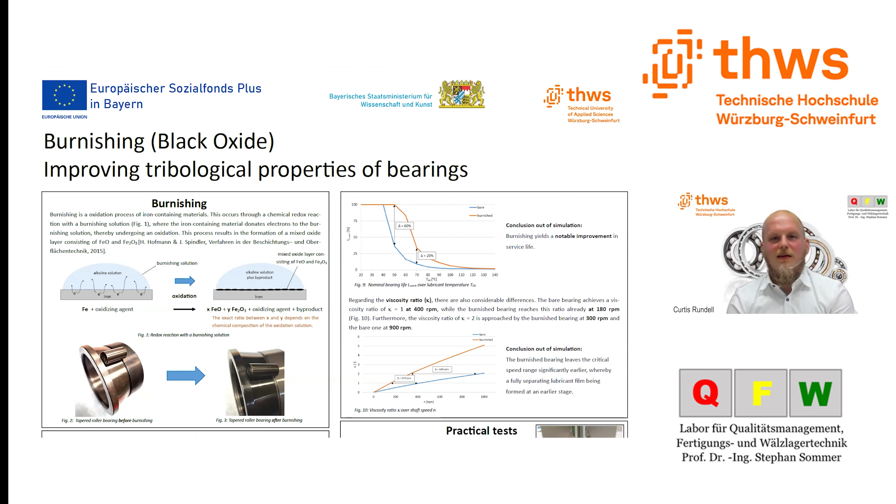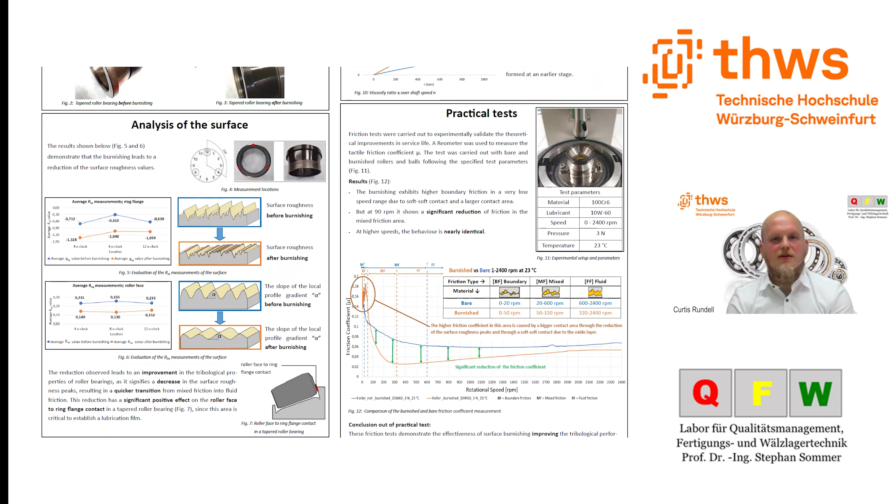Hello, my name is Curtis Rundell, and I'm an ongoing master student for production and system development at the Technical University of Applied Science, Würzburg-Schweinfurt. I am also a research assistant for Professor Dr. Sommer in his laboratory for quality management, production, and bearing technology.

As working as a research assistant, Professor Dr. Sommer assigned me and two other research assistants, Anna Heinle and Dominik Stephan, to analyze the impact of burnishing on the tribological properties of bearings, and in particular, the effect on tapered roller bearings. This is because he has the thesis that burnishing will reduce the surface roughness, and this will lead to an improvement in the tribological properties of the tapered roller bearing due to the flange face contact that occurs in such a case.

The way we designed our approach to analyze the effects of burnishing can be seen through our poster we created to publish our results. We divided the workload among the three of us. It was my job to gather the theoretical information on burnishing and then to develop a way to analyze the effects of this treatment to the surface it is applied on. Anna Heinle was then responsible for creating a suitable simulation model and then to simulate the results that have been gained through the analysis. To finish our research and to tie all loose ends, Dominik Stephan was then in charge of the practical tests so we could compare the measured and simulated data with the real life.

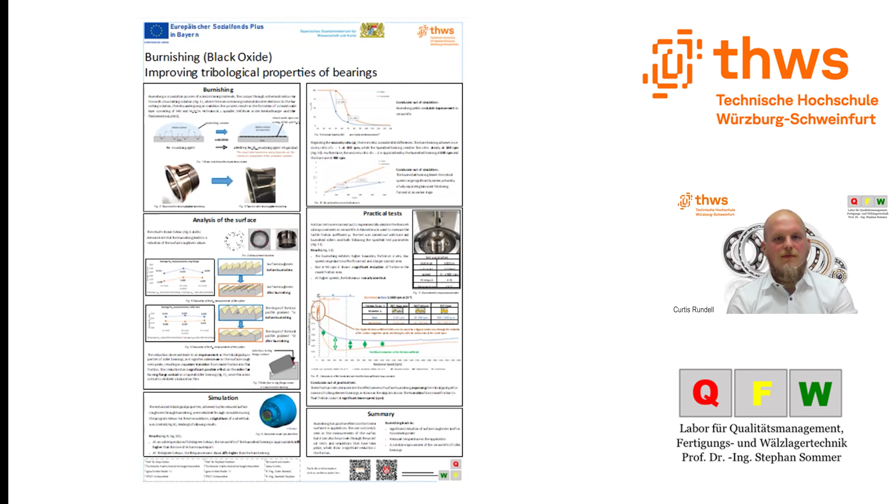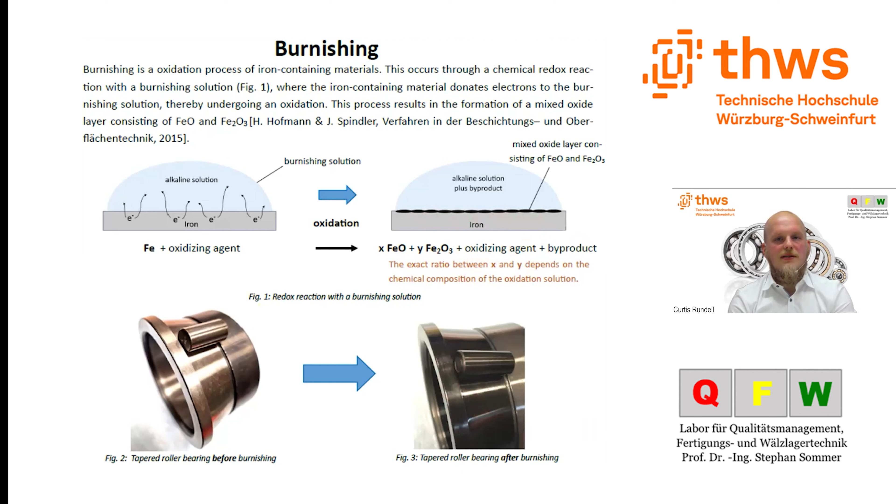So, if we look at what burnishing is, then we can see that this is a chemical reaction of an iron-rich material with a burnishing solution. This reaction is a redox reaction, where the iron gives the solution its electrons, undergoing an oxidation in which a very thin layer of mixed oxide consisting of FeO and Fe2O3 is developed, as shown in Figure 1. These are iron oxides, leading to the characteristic blackening of the surface, also shown in Figures 2 and 3. To mention here is that the exact ratio of FeO and Fe2O3 depends on the composition of the burnishing solution.

Now let's look at the analysis of the surface. Important also to mention here is that we disassembled the bearings and measured the surface of each component multiple times before and after the treatment with the solution. The exact measuring location and direction is pictured in Figure 4, and the results of these measurements on the inner ring flange and the roller face are pictured in Figures 5 and 6.

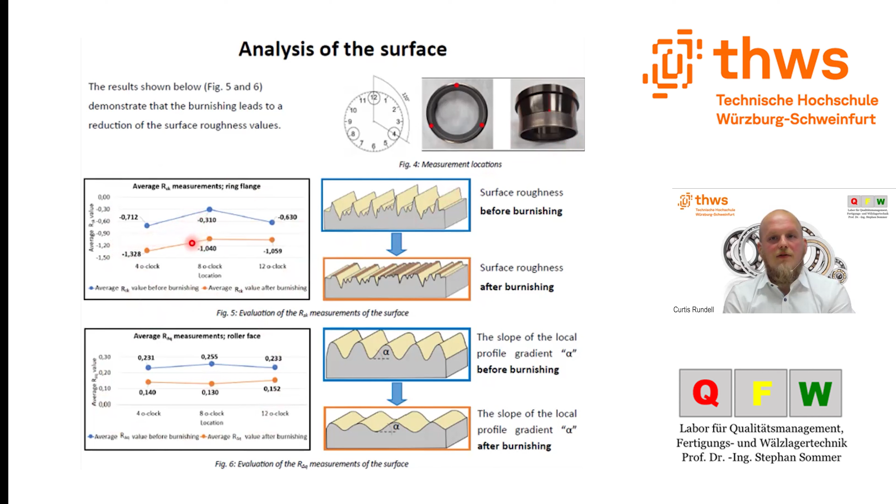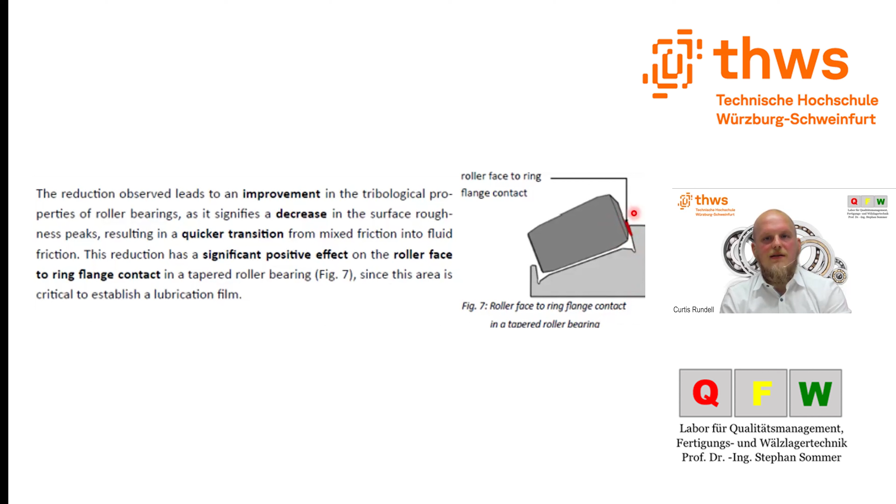If we look at these graphs, we can see a significant decline of the surface roughness values of the inner ring flange and roller face after the treatment with the burnishing solution. These significant reductions all indicate that through this treatment, the tribological properties of the tapered roller bearings must have been improved, and in particular because the reduction is also observed in the area where the flange face contact occurs. To verify these results, let's look at the simulation. For this, I will now let Anna Heinle take over.

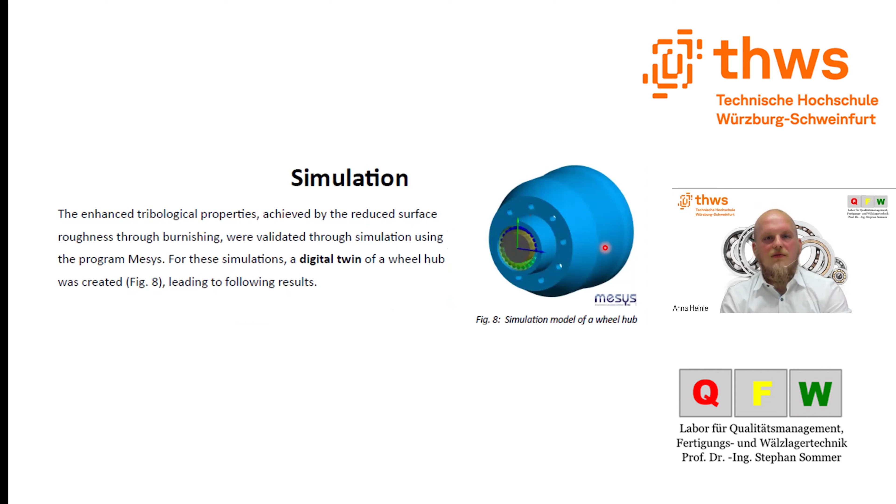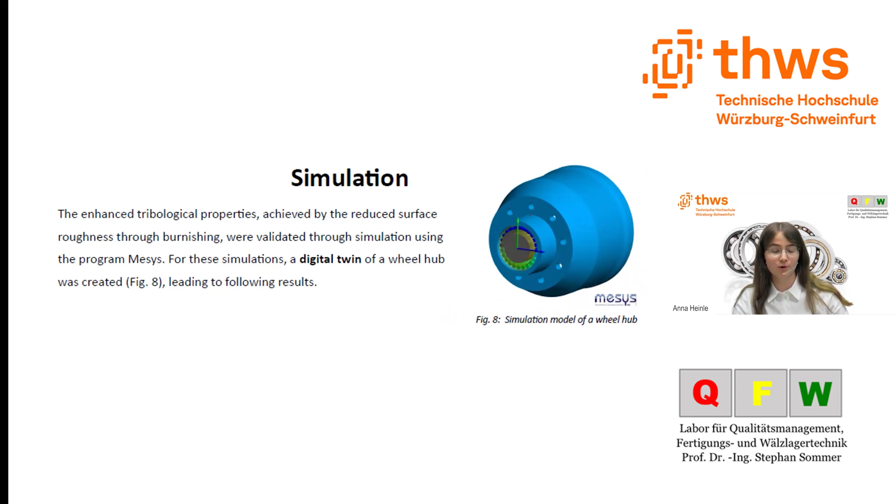Thank you, Curtis. My name is Anna Heinle, and I'm a bachelor student at the Technical University of Applied Science, Würzburg-Schweinfurt. And I'm also a research assistant in the laboratory of Professor Sommer. In this project, my main focus was on bearing simulation. For our simulation approach, I created a digital twin of a wheel hub in a bearing simulation program, MESYS. This is what you can see here in the right upper corner. The aim of the simulation was to investigate the effects of burnishing on bearing lifespan and other important properties of bearings. So let's look at the results.

In this diagram, for example, the bearing lifespan is plotted against temperature. At an oil temperature of 50 degrees Celsius, for instance, the lifespan of the burnished bearing is about 60% higher than the one of the bare bearing. Or regarding another point, at 70 degrees Celsius, the lifespan is still about 20% higher than the one of the untreated bearing. As you can see, the diagram shows clearly that a reduced surface roughness of the bearings through burnishing leads to a significant extension of the lifespan.

Another great indicator for the advantages of burnishing is the viscosity ratio kappa. As shown in the diagram, the untreated bearing reaches the viscosity ratio of kappa equals 1 at 400 rounds per minute, while the burnished bearing achieves this ratio already at 180 rounds per minute. The viscosity ratio of kappa equals 2 is reached by the burnished bearing at 300 rounds per minute. The untreated bearing reaches this value significantly later at 900 rounds per minute. So you can see, the burnished bearing leaves the critical speed range significantly earlier. That leads to the formation of a fully separating lubricant film at an earlier stage. And this, in turn, reduces wear and increases the lifespan.

Through these simulations, we confirmed that burnishing leads to significant improvements in the tribological properties of bearings. To further validate these results, we also conducted practical experiments, which will now be presented by my colleague Dominik Stephan. Thank you, Anna, for your insightful overview of your simulation approach. My name is Dominik Stephan, and I'm a master student of product and system development, as well as a research assistant at the Technical University of Applied Science, Würzburg-Schweinfurt, and I am responsible for the practical tests.

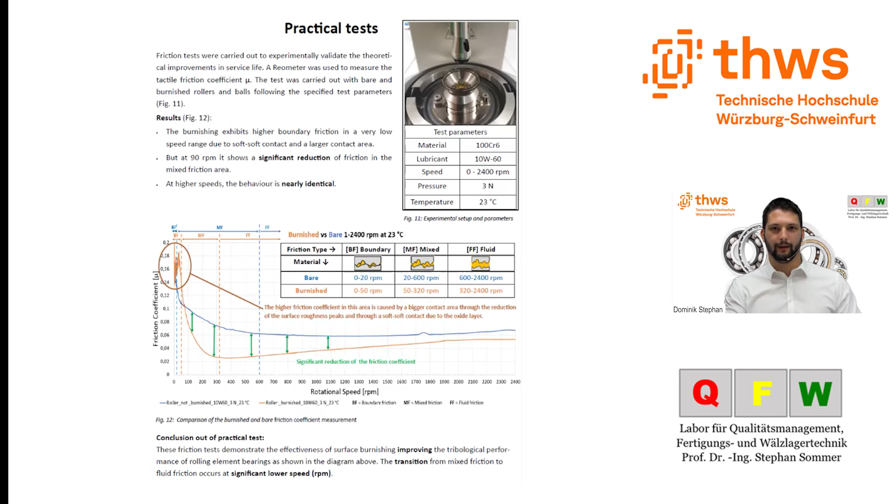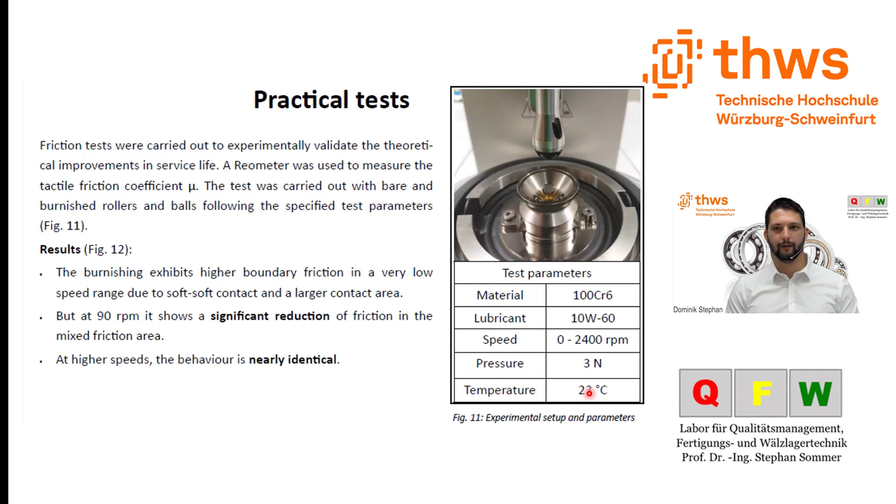Now I'd like to shift gears and showcase the practical test results, highlighting the real-world application of our project. The test was conducted to validate the predictions of the theory and the simulation. For this, we use a rheometer, which allows us to measure the friction coefficient μ for both bare and burnished rollers and balls, following the specific test parameters shown here in Figure 11. The acquired results shown in the diagram clarify the difference in friction behavior between the bare and burnished surfaces at different speeds.

It needs to be highlighted that the burnished surface exhibits a higher boundary friction in very low speed ranges due to the soft-soft contact and a larger contact area resulting from the reduction of surface roughness. This behavior changes at 90 RPM because the friction coefficient of the burnished component cuts the graph of the bare one, and from this point on, its value always remains below it. This indicates a faster transition to the mixed friction area. At higher speeds, the behavior is nearly identical. These friction tests demonstrate the effectiveness of surface burnishing, improving the tribological performance of rolling element bearings. The transition from the mixed friction to the fluid friction occurs at a significantly lower speed range.

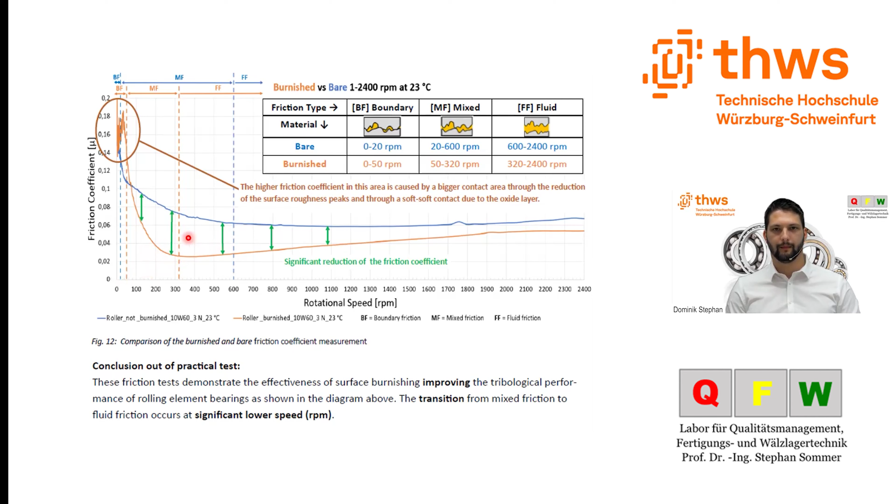In summary, it can be concluded that the application of burnishing has positive effects on the treated surface. This is evident not only from surface measurements, but also from practical tests and simulations, which demonstrate a significant reduction in friction.